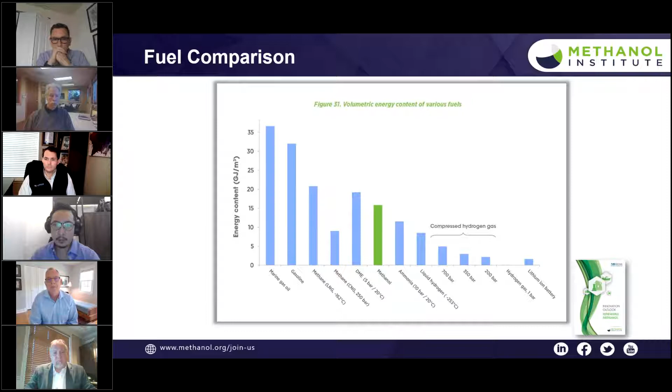Now, we all like to color code our fuels. For methanol, looking at the bottom, coal-based methanol or coal gasification of methanol would be considered brown methanol, and that's primarily done in China. Gray methanol is produced from natural gas. Again, mature technology, 5,000 metric ton per day facilities.

Now, that existing methanol plant from natural gas can also be turned to producing blue methanol, and that can be done by introducing hydrogen, green hydrogen as a feedstock, renewable electricity, or captured CO2 to produce blue methanol, where you've lowered the carbon footprint of an existing natural gas-based facility.

For green methanol, again, we have two different pathways: biomethanol produced from biogas or biomass gasification, and then e-methanol produced from green hydrogen, renewable electricity, and CO2.

Now, that CO2 can come from several different sources. It can come from industrial flue gases, unavoidable CO2 emissions from things like steel or cement plant. Methanol can also be produced from the CO2 can also come from biomass gasification, so a hybrid configuration.

Where you get the hydrogen through electrolysis of water using renewable power, solar or wind power, and then the carbon part of the methanol molecule, CH3OH, can come from biomass gasification. Or in the future, as we see the technology for direct air capture of CO2 come online, we can produce e-methanol from hydrogen and direct air capture CO2.

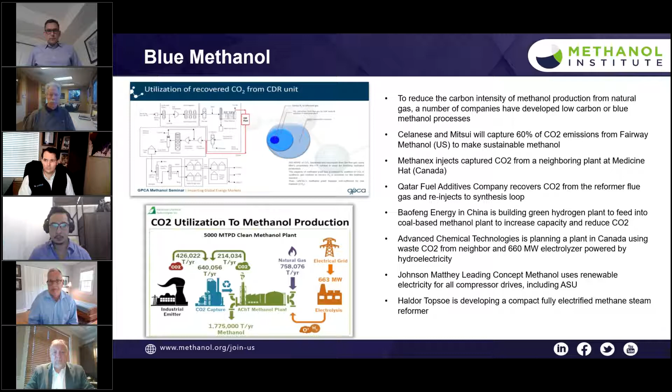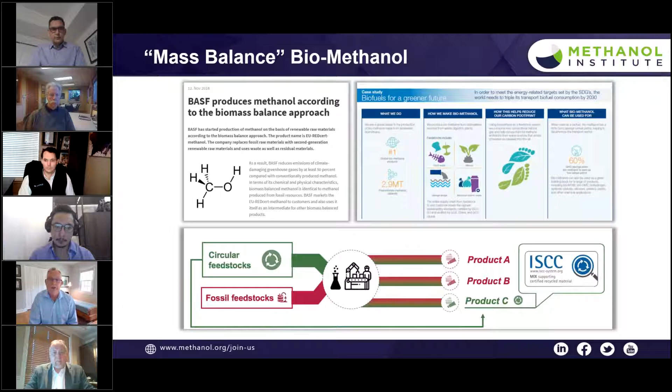Another way of reducing the carbon intensity of methanol from natural gas is to replace the conventional natural gas with biomethane or biogas. Companies like BASF and OCI BioMCN are doing this today with ISCC certified biomethanol produced on a mass balance basis using biogas as a feedstock instead of conventional natural gas.

The most recent e-methanol plant opened last October in China. This is a liquid sunshine project, as they call it in China. It's using 10 megawatts of solar power to produce 2,000 metric tons per year of e-methanol. In China, they are very keenly interested in the production of renewable methanol, and we expect to see that grow considerably in the coming years.

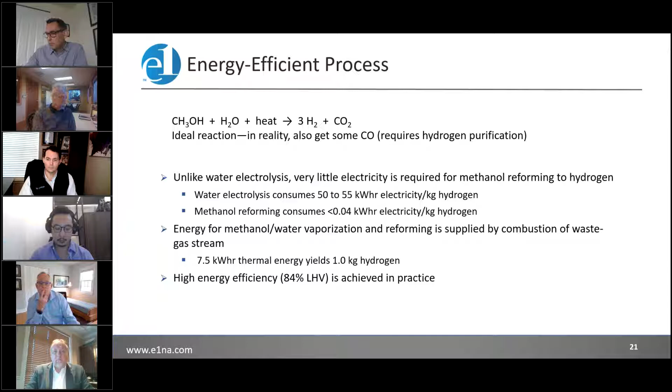At Element 1 we have 3 different product lines of hydrogen generators, shown in these 3 photographs. All of these hydrogen generators are fully automated for unattended operation. On the left is our S series, a small stationary hydrogen generator. It's been deployed delivering up to 0.7 kilograms of hydrogen an hour, which mates well with up to a 10 kilowatt fuel cell. It's ideal for backup power and small primary power applications, again mostly stationary.

In the middle and on the right, we have representations of larger hydrogen generators. These go up to just shy of 10 kilograms of hydrogen an hour. The center figure is what we call our M series, designed specifically for heavy-duty mobility applications — it's meant to be put on a vehicle. On the right, we have a very similar configuration with a somewhat different controller, designed for large stationary applications, again primary and backup power.

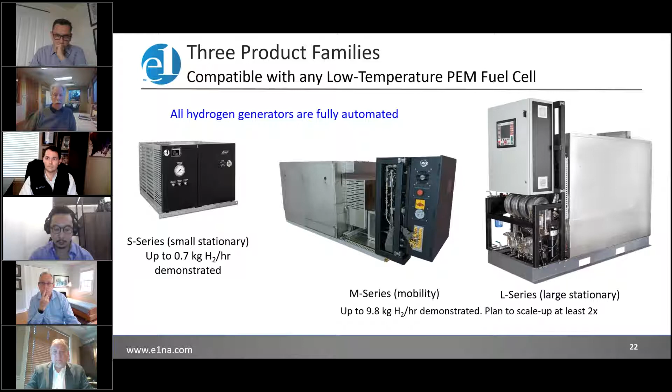Now, to integrate a hydrogen generator with what I'll generically call a hydrogen consuming device, the schematic for that integration process is actually very simple. To be clear, a hydrogen consuming device might be a compressor if we're talking about hydrogen fueling stations, a fuel cell if we're talking about electric power generation, or some other device or industrial process that consumes hydrogen.

The interface is a low pressure buffer tank, shown by the green block in the middle of each of these two figures. On the left, we have a simplified schematic for a hydrogen fueling station, and on the right, a fuel cell power system. The hydrogen generator produces hydrogen, which flows directly to the buffer tank. This is purified hydrogen, typically 99.99% purity with less than 0.02 ppm impurity.

That low pressure buffer tank then feeds the hydrogen consuming device. If it's a compressor, the hydrogen is drawn into the compressor where it's discharged at very high pressure to a storage tank for further dispensing into vehicles. The pressure in that high pressure storage tank provides feedback control to the compressor. The hydrogen generator simply looks at the pressure in the low pressure buffer tank, which cycles between a minimum and a high pressure, and all the hydrogen generator tries to do is maintain pressure within that range.

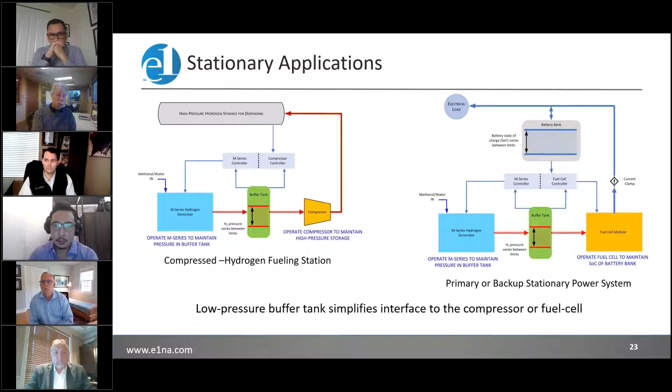Now, when we think about onboard hydrogen generation, we have a very interesting comparison to make with storage of compressed hydrogen on the vehicle. To illustrate this, I'll consider a North American heavy-duty truck. In this figure, behind the cab, we have this black enclosure containing multiple carbon fiber cylinders for storing high pressure hydrogen. This configuration is designed to store about 80 kilograms of hydrogen.

80 kilograms of hydrogen in a heavy duty vehicle like this will give a range of up to 600 miles. We can also generate that amount of hydrogen over the same number of hours it would take to drive that distance with a relatively small sized hydrogen generator producing only about 7 to 10 kilograms an hour of hydrogen.

To drive 600 miles, we need a little over 1,000 liters of methanol water mix. It's easy to put more tankage on this vehicle, so you could easily extend that range by a factor of 2.

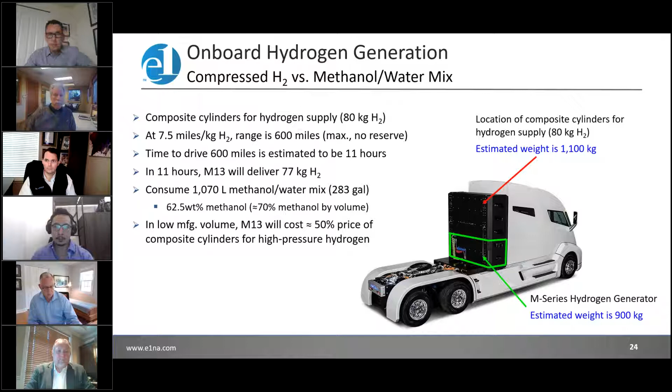So when we think about the various factors important to operating an electrified fuel cell vehicle, and compare onboard compressed hydrogen with onboard hydrogen generation, we find that the hydrogen generator is better in terms of lower capital cost and smaller size. In this photograph, the green outline on that black box shows the relative dimensions of the hydrogen generator. It takes half the space that would be occupied by the cylinders for compressed hydrogen.

The cost of hydrogen, if we make it from methanol, is going to be in the $3.5 to $5 per kilogram range, versus probably $10 to $16 a kilogram if the vehicle is refueled with compressed hydrogen. As I mentioned before, we can double the range easily by putting liquid methanol water on the vehicle and making hydrogen on demand versus storing compressed hydrogen.

Now, the hydrogen generator, regardless of whether it's a stationary or mobile application, will have 3 normal operating states: on, where we're making hydrogen; off, where it's not energized or electrified; and what we call hot standby. Hot standby is a normal operating state whereby the hydrogen generator is at its operating temperature and is maintained at that temperature by a modest amount of electric power, perhaps from the onboard battery bank or a plug-in umbilical. Transitioning from hot standby to on, making hydrogen, is very fast, on the order of 1 to 2 minutes.

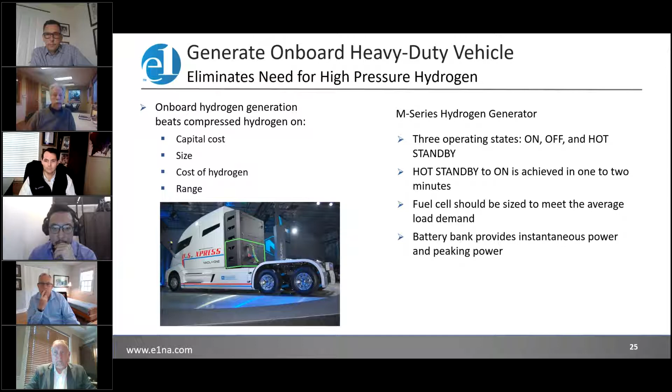Thank you. Now, there are a number of applications, commercial opportunities that we're looking at. Top of the list is hydrogen fueling stations. Again, because we can make hydrogen at an advantageous cost from methanol versus transporting compressed hydrogen to a fueling station, this is a very attractive opportunity.

Hydrogen generation onboard heavy-duty vehicles, including trucks, trains, and most recently ships and boats, is also very attractive. In these two photographs, we have a medium-duty truck made by FAW. This truck has a fuel cell power system and an onboard hydrogen generator, circled in green and positioned behind the cab—the same real estate that would have been used for cylinders of compressed hydrogen.

Last fall, we completed 5,000 kilometers of on-road testing in China without a single fault or failure on the part of the hydrogen generator. Now, I mentioned ships and boats.

The maritime sector is of a very high degree of interest, and we're embarking on a new joint venture with 2 partners, maritime partners out of New Orleans, Louisiana, and Ardmore Shipping out of Cork, Ireland. I'm going to leave it to my colleague Stuart to talk a little more about that.

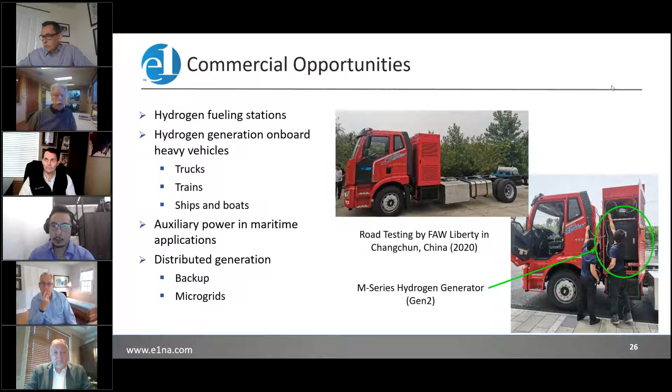Thanks, Dave. I want to hold you for a second here because I got a pretty interesting question. Usually we'll leave it to Q&A, but I think this can really bring some perspective. The question was, how much energy as a percentage of the hydrogen being compressed or stored is required to compress hydrogen to, say, 700 bar?

I'm going to work from memory, which is always a little bit risky, but I think the answer is about 15%. So that would be a 15% loss of the hydrogen that you're trying to store? That's correct. That's correct, yeah.

And I'm just going to expound on that for a few seconds here. Obviously, if we're not storing compressed hydrogen and alternatively we're making hydrogen and delivering it at low pressure to a fuel cell or some other industrial process, we're saving energy. That's a more efficient loop to follow.

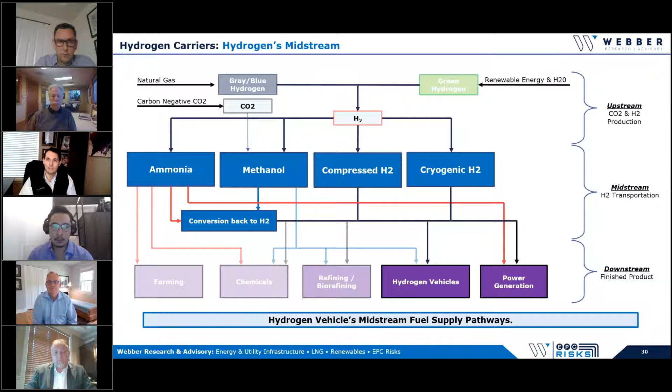So like a good ex-capital project person, we focus a lot on safety. And when I talk safety, I really wanted to bring in an expert to help us understand this better for future fuels. So I've worked with Baker Risk in the past, and what they do is they specialize in site studies for insurance companies and post-incident analysis around a lot of these future fuels. If there is an incident, they're typically the ones that get called to come analyze what went wrong and how it went wrong, and how to mitigate that issue in the future.

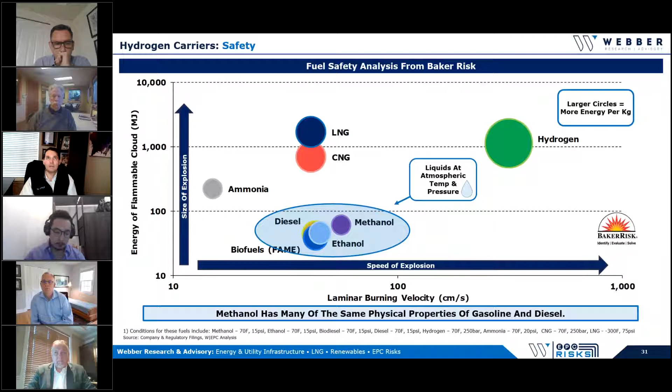So they provided a little bit of insight to us around the flammability and explosive radius potential of future fuels and how to mitigate that. Methanol, being a liquid similar to diesel, gasoline, and ethanol, and having those similar characteristics, provided somewhat of a less dangerous public safety exposure when compared to other gaseous fuels that are in much larger quantities. So by minimizing these quantities in public spaces, we minimize the risk. That's why methanol has been able to provide that kind of consistent approach to fuels.

We also looked at the logistics of these fuels. When I originally did my hydrogen roadmap, I actually stopped, like a lot of people, at just the hydrogen content of the fuels, meaning methanol's hydrogen content versus ammonia's hydrogen content. Ammonia has more hydrogen than methanol, so ammonia transports more hydrogen than methanol.

Well, if you look at the entire value chain and the steam methanol reforming process on the back end, you're actually adding 30 to 40% green hydrogen on the back end of your green methanol transportation cycle. So the benefit of the E1 system is you're actually transporting, if you use pure methanol from Australia to Japan or Australia to Korea, more hydrogen to the end user. This is something that's kind of missed unless you're looking at the entire value chain.

As far as logistics, we're also considering the storage cost per kilogram of hydrogen. Methanol as an atmospheric liquid requires less storage cost compared to ammonia, which may use LPG type cylinders, cryogenic hydrogen, or compressed hydrogen. That dollar per kilogram has to be recouped at the pump, at the end user, in certain circumstances. So that buildup cost and total CapEx cost is important to remember when looking at the total value chain.

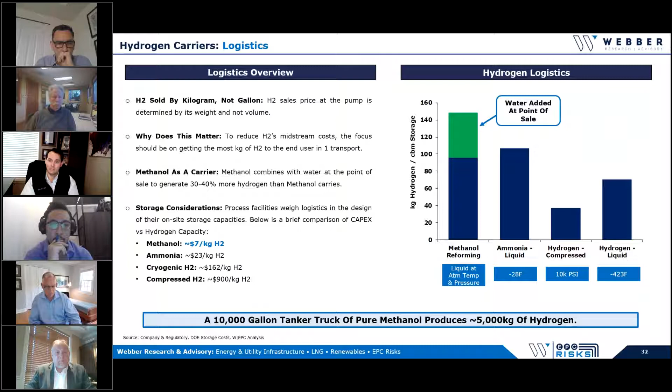Now, I know I'm speaking to the Methanol Institute crowd, and I'm not trying to pile on ammonia here, but this is a specific case looking at ammonia at gas stations versus methanol at gas stations. We have to look at where the majority of the cost is associated at the pump. A lot of the marketing we hear is $1.50 per kilogram of hydrogen, $2, $3 per kilogram. That does not take into account the full buildup cost that we see at the pump, $16, $14, $15 per kilogram. So this midstream sector is so important in reducing the cost of hydrogen to end users.

When we talk ammonia and the higher cracking temperature necessary there, and the toxicity exposure to the public, the current approach is to have a centralized cracking process, compress that hydrogen, store it at high pressure, and then transport that to the gas station. This limits your efficiency and increases your cost at the end of the day, whereas a system like Dave's can take methanol all the way to the gas station.

And I'm sure Greg will recognize these numbers, but there have already been gas stations converted to methanol using existing 10,000 gallon tanks. This can be done for $20,000 to $75,000 per gas station 10,000 gallon tank. And just as a comparison, a 10,000 gallon tank using an E1 system would produce essentially 5,000 kilograms of hydrogen on site.

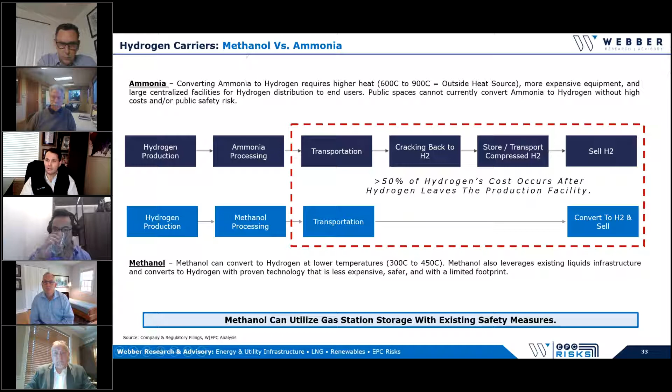Currently, compressed hydrogen takes about 10 to 12 hours to load into a truck. So that is a person's time sitting there at the pump, waiting for it to load, or waiting off to the side at a hotel somewhere for it to load. Methanol can do this very efficiently. It offers that back-end steam methanol reforming that reduces the cost and offers this cut cost of $6, $8 per kilogram of hydrogen.

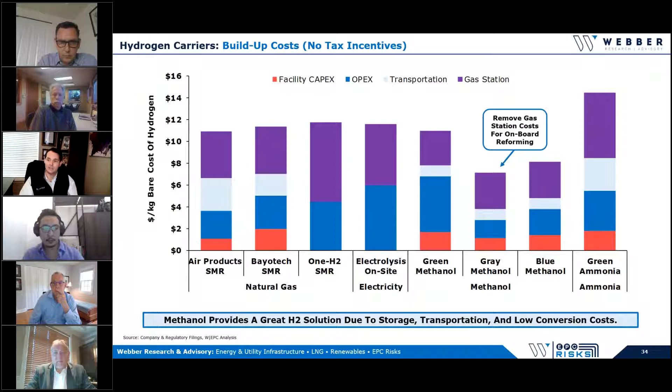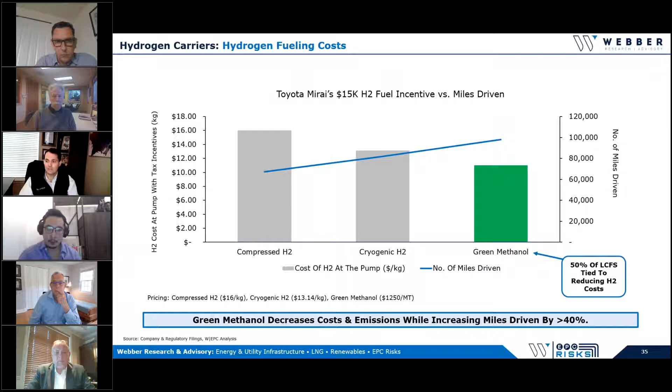All right, so I'm going to give ammonia a second to shine. We're big LNG guys as well, so we talk a lot about LNG in the future that we see there. And so large scale power generation, turbine systems, when we talk multi-100 megawatt systems and what's being talked about in Japan and Korea, this is where blue ammonia has an opportunity, displacing the LNG market with close to carbon neutral fuel application.

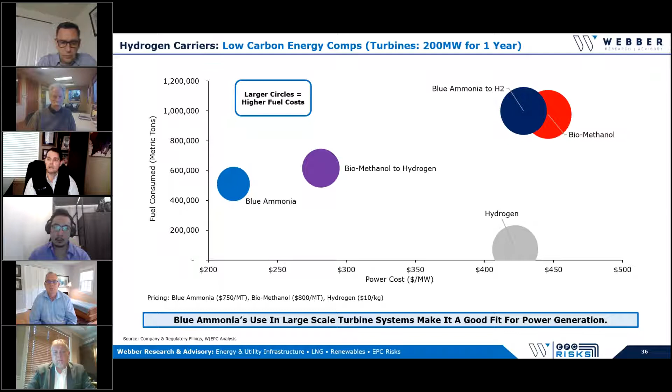Biomethanol to hydrogen here offers a close second. It really depends on the efficiency of the turbine systems when they become commercialized and where a hydrogen turbine ends out versus an ammonia turbine.

But where we really see the benefit of methanol is going to be in the mid to low scale power generation. And the way to read this is the y-axis is fuel consumed, the x-axis is dollar per megawatt.

So when you're looking at biomethanol converted to hydrogen using a high efficiency fuel cell, like a low temperature PEM fuel cell, give Ballard a plug, a Ballard fuel cell on the back end, it beats the efficiency of other applications on conversion cost. It makes a lot of sense for stationary power, on-ship power, and vehicle power.

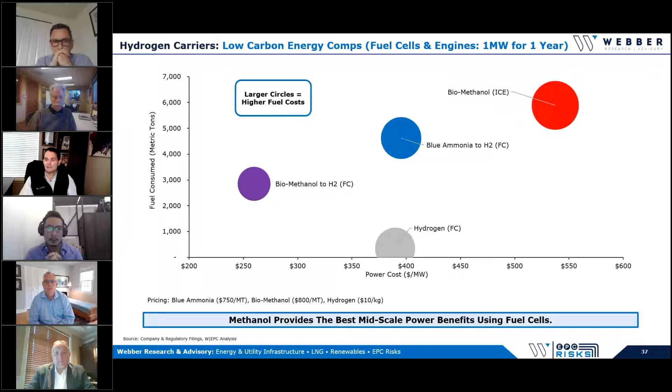And that's it for me.

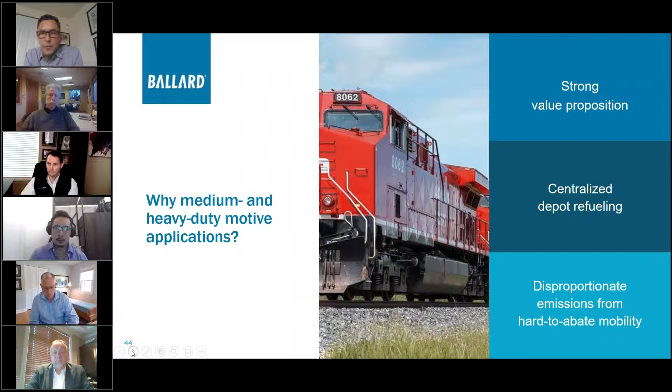Hydrogen, and a fuel cell inside, compared to batteries, enables you to avoid any compromise on payload or range. You can have very long, 600 miles, 1,000 miles vehicle operation without having to compromise on weight. If you want to do that with batteries, you're going to have to pack a lot of batteries on board of your vehicle.

On a truck, for example, the truck starts carrying more batteries than it can carry actual goods. So it's very important to maximize the range and maximize the payload for the operator. Because electric vehicles are more expensive than diesel vehicles, you also want to optimize the usage of your vehicle, maximizing utilization. You don't want those vehicles plugged into a charger for hours, you want to use them on multiple shifts.

That's why having a very quick refueling time, refueling methanol or hydrogen very quickly so you don't immobilize the vehicle, is very important for commercial applications. So you want maximum range, no compromise on payload, and to utilize the vehicle as much as you can. Fuel cell technology coupled with hydrogen, or a hydrogen carrier like methanol, enables you to basically have the same mobility operation that you have with diesel today.

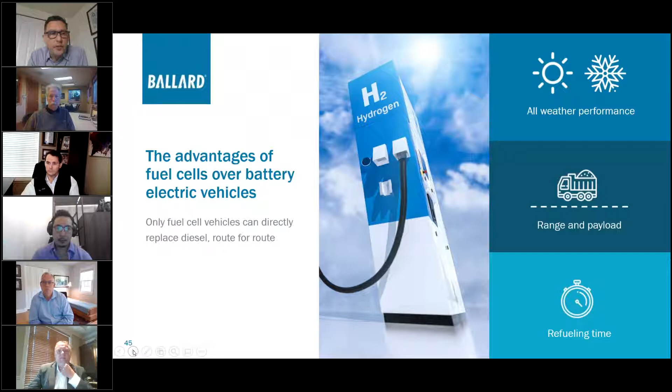Just quickly, as I mentioned, that's what Ballard is doing. We have people dedicated to development of fuel cell technology, mainly focusing on heavy duty mobility. As you can see, buses, trucks, trains, ships - we're putting them on the water, on the tracks, on the road, and that's what we do. We have tremendous expertise, with over 88 million kilometers of vehicle operation on the road, gathering data every day.

So we really understand how a fuel cell operates and what it needs, and we bring that expertise to the mobility market. I want to share with you some applications today where fuel cell makes sense and where there's a need for a lot of energy, and where methanol can provide a carrier to feed hydrogen.

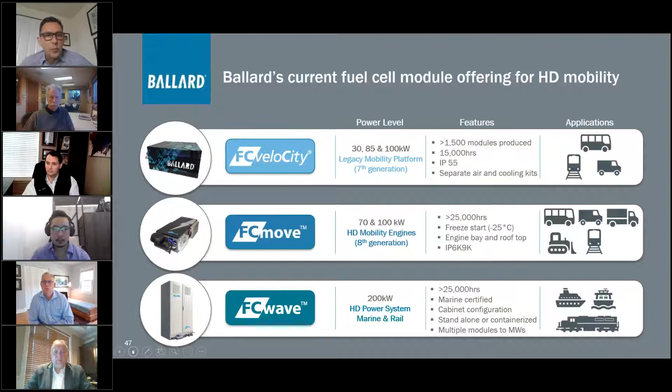The same thing on the stationary side. We can look at fuel cells for backup power on small telecom sites, but also very large megawatt backup power systems for data centers, for example. It can be done in building blocks. We have two series of building blocks at Ballard - a 200 kilowatt cabinet, and we're also developing a containerized 1.5 megawatt solution. You can combine several of them for larger power generation systems.

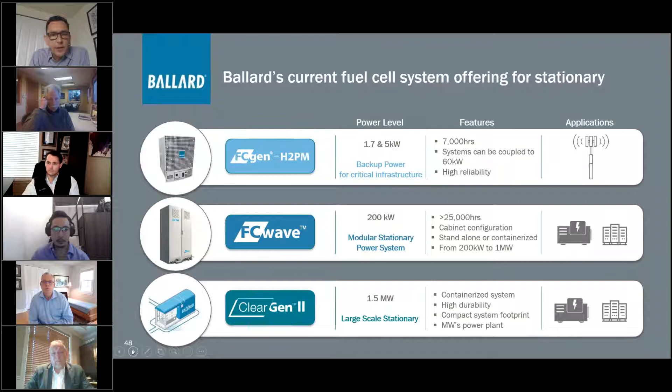If you look now at mobility a little bit more, I want to show you some examples of actual vehicles on the road. Let's go to the next slide.

Next slide, going to be a bit...

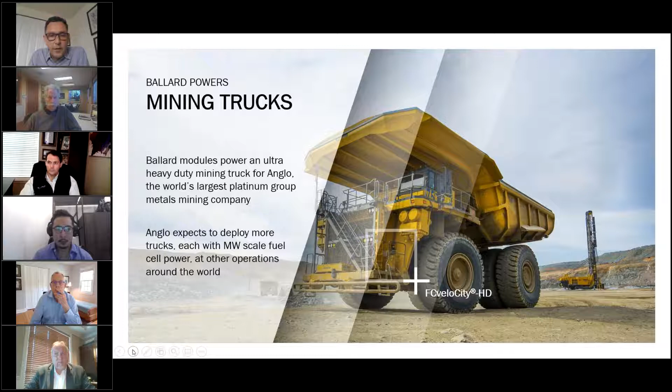Next slide. And as we move up to those very big trucks, here is an example of a truck we are doing for a platinum mine, actually in South Africa, with Anglo American. There's going to be around 800 kilowatts of fuel cell system installed. As you can imagine, it's going to use a lot of hydrogen. So we're looking at options - is hydrogen gas really the best option for those vehicles? I think that's what we're exploring now, just to look at how do we address the super heavy mobility where you need a lot of energy to move those vehicles.

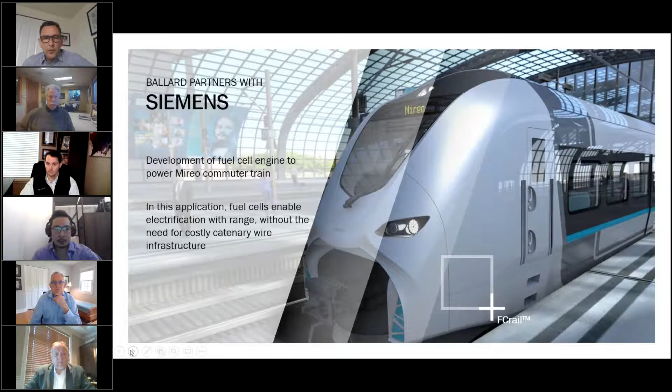Next slide. Good example of a passenger train we have in Europe, developing with Siemens - a regional train operating, and then same thing in UK, all of them using fuel cell for zero emission train operating on non-electrified track.

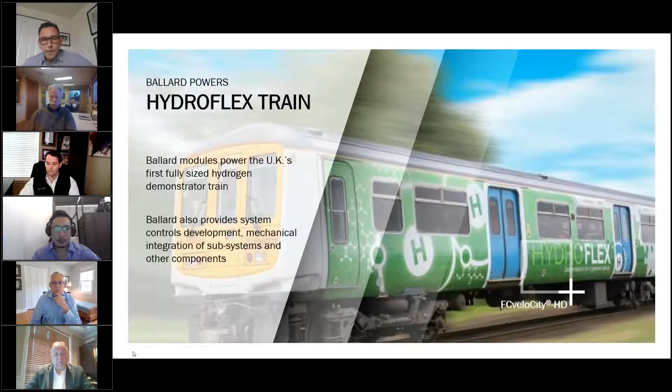So that's the end of my presentation, I believe.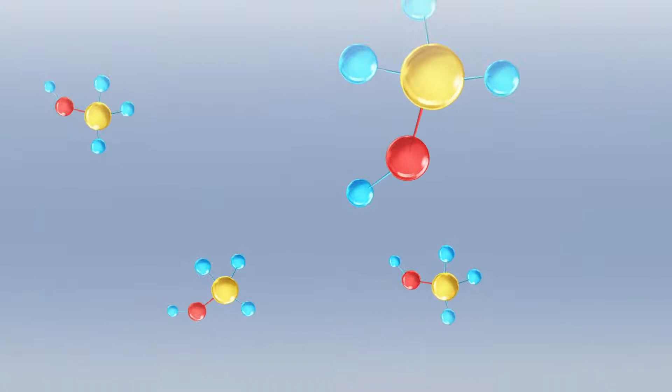Methanol mixed with water in a 1:1 molar ratio is an ideal liquid carrier for hydrogen. One third of the product hydrogen comes from water. This water needs to be desalinated and deionized. It may be drawn and purified from the water the vessel sails in.

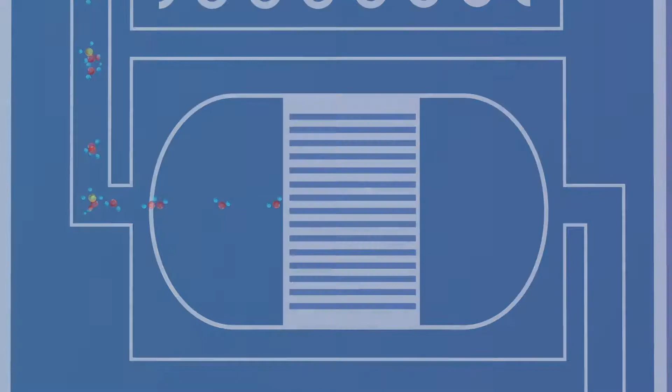The methanol water mixture flows through a heat exchanger into a catalytic reactor, wherein the methanol plus water is cleanly converted into hydrogen mixed with carbon oxides and other gases, without the release of SOx, NOx, and particulate matter. This gas mixture then flows through a novel purifier that delivers high purity hydrogen as the product stream and a waste stream, or fuel gas, as a byproduct.

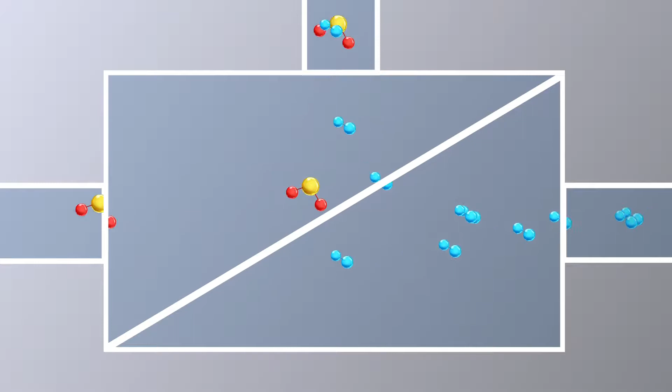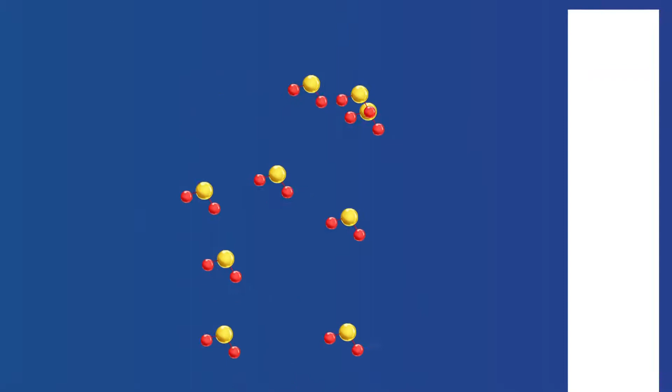This fuel gas is used to heat the process. The product hydrogen may be consumed directly by a fuel cell to generate electricity, or directed into an internal combustion engine, supplementing the normal liquid fuel, regenerating water as a byproduct. In the future, we will have the option of capturing carbon dioxide from the fuel gas stream, potentially driving the overall carbon intensity to very low values, in certain cases, even negative values.

Presentation. So one of the beautiful impacts of this is that water can come from the water that the vessels are sailing in.

Obviously, it needs to be desalinated, it needs to be purified, it needs to be deionized, but we're getting 33% of the hydrogen from the water we're sailing in. And that means that we don't need to transport that water directly to the vessel. We can just pull it from the environment that the vessel's sailing in, which is ideal.

And what that means is methanol is that key carrier for hydrogen. That's what we believe at E1 Marine. We believe that coupling up with the methanol reformer will provide that solution. And yeah, this is how we see the future developing. I think that's it for me, Tim. Thank you.

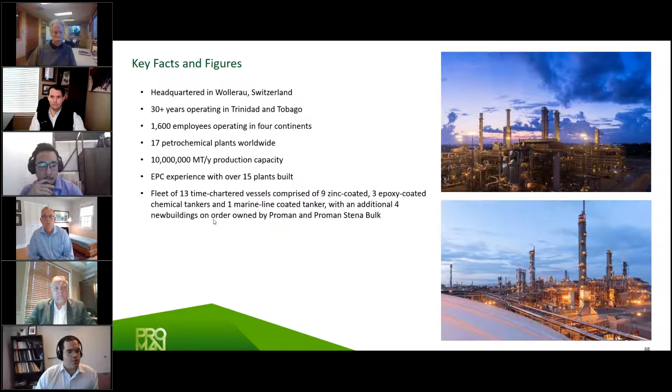Over 10 million tons of installed capacity, EPC experience, as well as 13 time chartered vessels. Needless to say, we're big believers in the methanol economy. Just looking at our global footprint and where we're placed to meet the future demands of hydrogen as a renewable energy source and methanol as a hydrogen carrier.

As I said before, our production facilities are diversified throughout North America and also Oman. And looking at the world in the future, we're also seeing a lot of growth opportunities throughout North America, Latin America, Northern Africa, Europe, as well as Asia and Australia.

Moving on, we are the second largest merchant methanol producer in the globe, but we don't stop there. We're also really committed to this green transition and have, over the last year, announced either major investments or major developments in this field.

We announced our participation in a project in Quebec, Canada, called the Varennes Carbon Recycling Project. This is a 100,000 ton per year biomethanol facility, which is going to be utilizing an 87 megawatt electrolyzer for makeup hydrogen. We use waste, so municipal solid waste, gasify it and convert it to methanol.

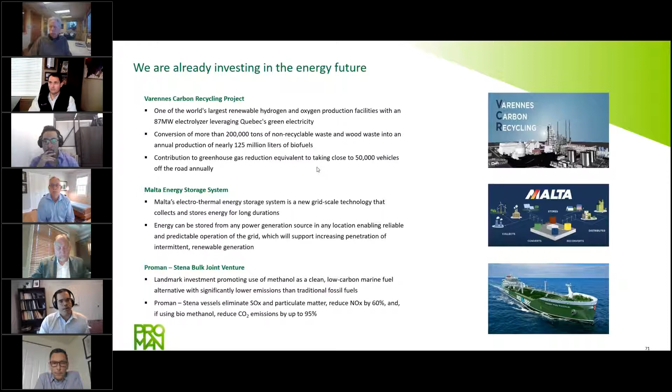I think I'll skip this slide. I think we've heard a lot about why methanol from all the other announcers.

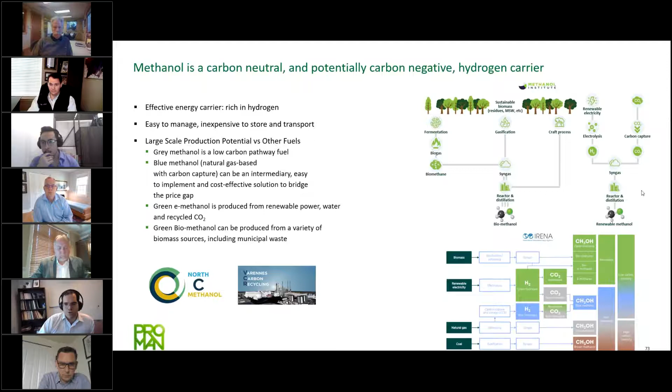Greg did a great job talking about the various pathways to creating methanol, using both MI's and IRENA's methodology, both from biomass, renewable electricity, natural gas, and coal. Those are the different colors of the rainbow, so to speak. I think that's very much understood by this team here.

So why did Proman decide to use methanol-powered ships? Aside from being a global leader in methanol production, I think we just had to show the commitment that we see this as a future-proof fuel. As the world transitions from fossil-derived methanol to more sustainable pathways, we felt that this was just the ideal fuel to actually send our chemical tankers around the globe with.

The transition to actually finding sustainable ways of production was key to our strategy. So we're not only looking at low carbon methanol, meaning blue methanol from Trinidad and our United States operations through carbon capture in the flue gas stack, but we're also looking at further developments into green methanol projects and constructing those projects. As I said before, we've already announced that first project in Canada. We're actively part of a consortium, the North C Methanol project in Belgium, and we also have further developments ongoing globally.

One of the biggest considerations of why we decided to go with methanol, since we're also among one of the top 10 nitrogen-based fertilizer producers, also in ammonia, was basically mostly safety. This is something Robert did a great job highlighting in his presentation. Methanol can be stored at ambient temperature, and you don't have the possibility of a huge safety issue with leaks that present with ammonia, for example. You could literally poison everybody on board of a ship.

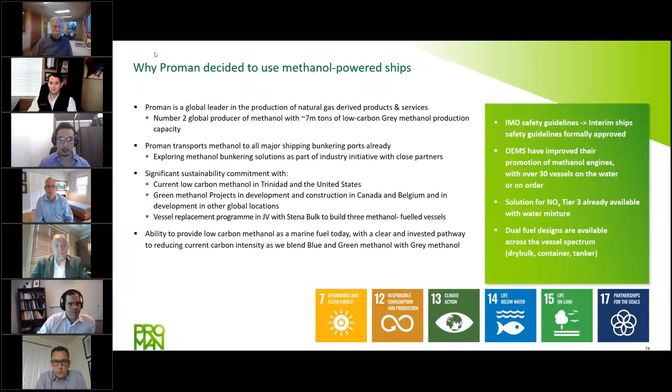A major consideration for methanol is that we currently have a lot of bunkering possibilities with the existing chemical distribution network, as well as the safety and handling benefits and reduced spill implications. We felt that the current global network methanol enjoys makes it very easy to make the step change into having it as a bunkering fuel, which is important for securing support from different ports and local authorities in implementing methanol as a marine fuel at grand scale.

Next slide, please. Okay.